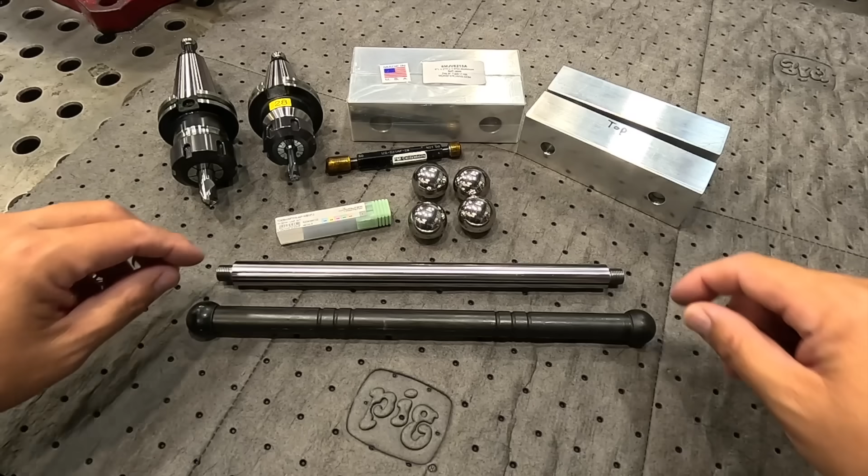In the previous video, we set this piece of material up. This is some 440C stainless steel, and we did our turning and threading on the ends there. Got that done, and now we're going to move on to the last phase of the vise handle, which is going to be the ball ends.

I'm kind of replicating the original vise handle here. This is what comes in the Kurt vise. One end of this handle is turned and threaded just like we did, except I went with 7/16-20 threads. This ball is manufactured with some threads so that it'll screw together, and they use some Loctite. That may be what we do as well, but we're gonna just replicate this.

So this is what we're gonna be doing, only I decided to up the diameter. I went with 1¼ inch, and of course stainless steel.

To start this job, I got some soft jaws right here. I ordered a set from Monster Jaws, so I got a couple pairs ready to go for whatever work we can use them for. I've got these two jaws, marked with the top anyway.

First phase of the project, we'll set these guys up in the CNC and machine a sphere pocket in there so that once these jaws are bolted in the vise, we should be able to capture this ball bearing, or the stainless steel ball. It's not a bearing, I keep saying that because it looks like a ball bearing.

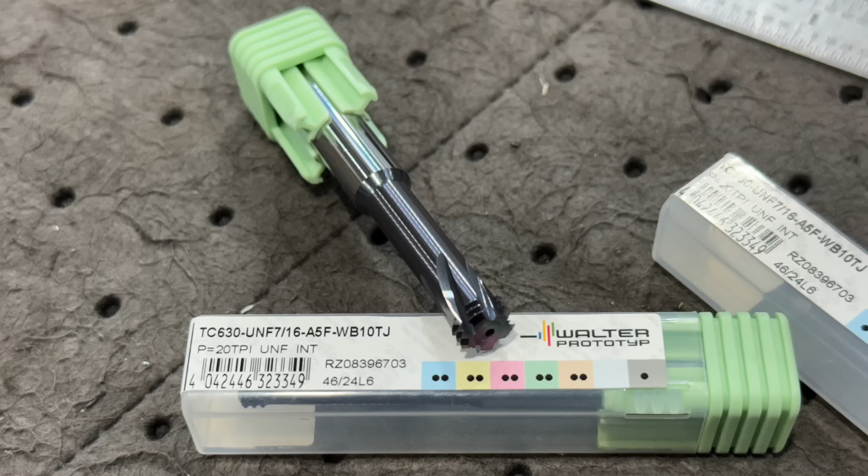This is a new thread mill, from Walter Tools. This one is designed for a 7/16-20 or 20 pitch thread, so 20 threads per inch, and I haven't used this type of thread mill yet. It's solid carbide, and hopefully it's going to work pretty good.

This kind of stuff makes me really nervous, but if everything's correct, we should be able to come in here in that hole and cut those threads in that ball. So that's the plan for that guy.

I've also got this go/no-go gauge that we can use to check our thread. Chances are it's going to be tight going in there the first time, and if that's the case, we're going to rerun the thread mill program by itself. Just make one more pass, maybe bump it over 1/1000th at a time, until we can get our go gauge to screw in there like it's supposed to. That's the plan there anyway.

I think what we'll do to start off, we'll go ahead and go to the computer. I'll give you a quick rundown of what the programs are going to look like, and after that we're going to get this set up in the Milltronics toolroom mill and get started on this job.

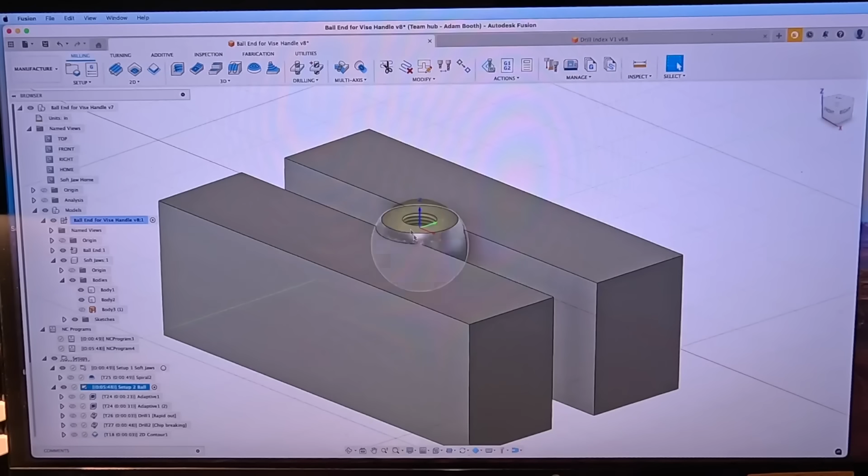All right guys, I'm going to give you a quick rundown in our Fusion 360 and show you what we're going to be doing here. So as mentioned before, we've got two setups. First setup is going to be machining the two soft jaws for our sphere, and then the second setup will be machining the sphere itself.

Okay, so we'll start with setup 1, which is going to be the soft jaws. We'll go ahead and activate that there. This is in the orientation that it's going to be sitting in for the machining, sitting in the vise. So we can turn off, let's see, it's body 2.

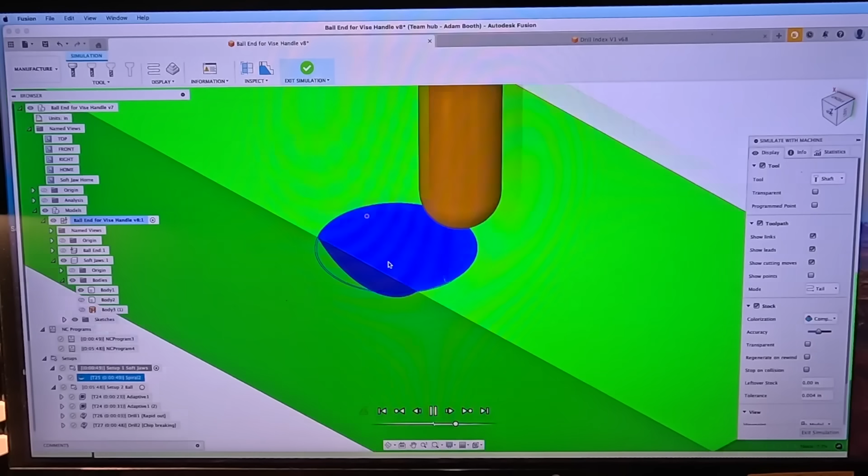Simple operation here. We're going to use a spiral pattern, so we'll go ahead and simulate this so you can see it. This is the 1/2 inch 3-flute ball end mill that we're going to be using to machine this. Spiral pattern, I've got it set at a 10 thousandths step over, so it's a constant engagement of 10 thousandths, and it's just going to spiral all the way down to the bottom of that pocket and get it all machined in one setup right there.

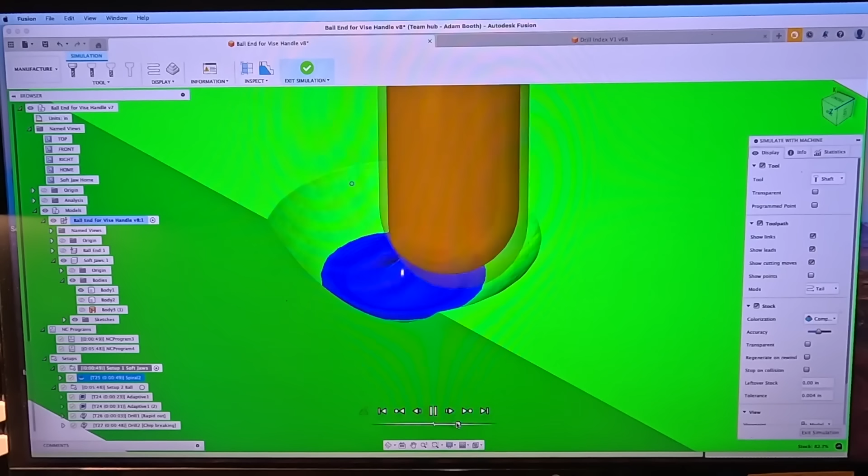All right, so we'll speed this up a little bit more. You can see it's going to go down and hopefully just machine a nice, clean, even pocket all the way to the bottom, just like that. Hopefully once this is completed, we'll have a nice pocket for our stainless steel ball to set in. So once this is done, we'll take this one out.

I'm going to go ahead and set up a work stop here. These jaws measure, I just use calipers. I haven't measured them with any kind of micrometer or anything, but the vise jaws seem to be very, very close tolerance to each other, I'd say within 1/1000th of an inch. So I feel pretty good about just simply using a work stop on one end, taking one jaw out, sliding the other one in, and hitting cycle start to get the second one milled.

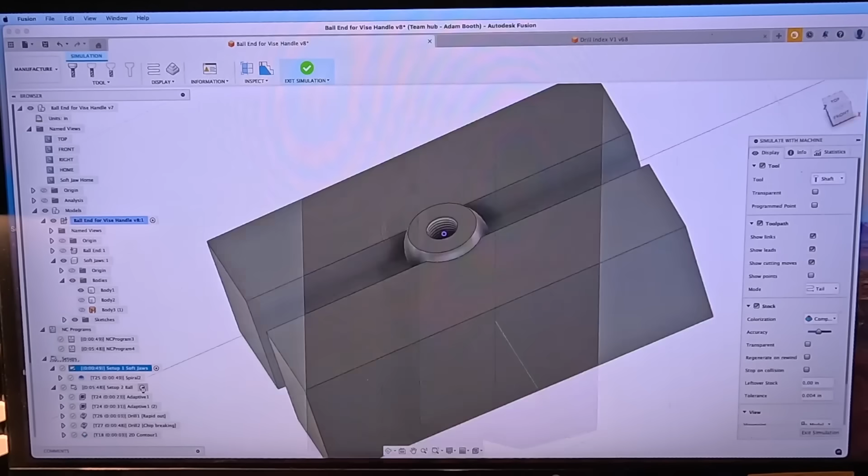All right, so that's setup one. We'll go ahead and transition to setup two, which is going to be machining the balls. This is what it should look like set up. We'll go ahead and simulate this one next. Let's see, simulate, and I'm going to slow this down a little bit.

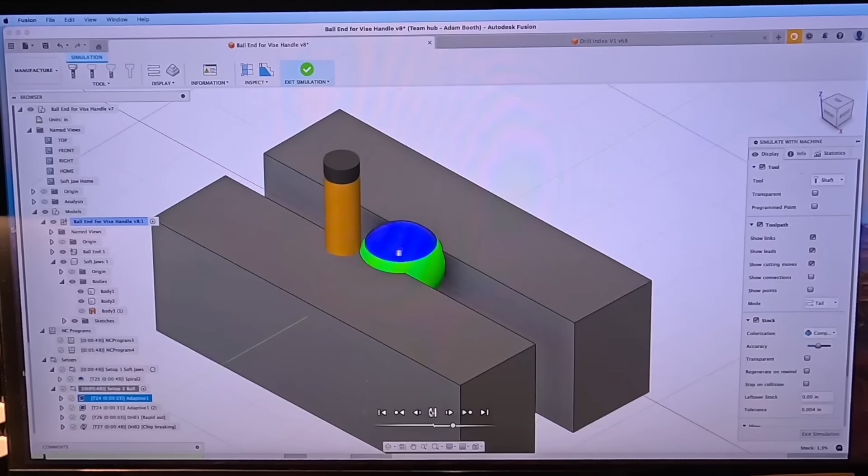All right, first setup, we're going to be using a 1/2 inch diameter 6 flute end mill. This is one that I've had that's worked really well, it's that IMCO power feed. And we're using an adaptive tool path here to come in and mill this. Let me zoom in so you can see it a little bit better.

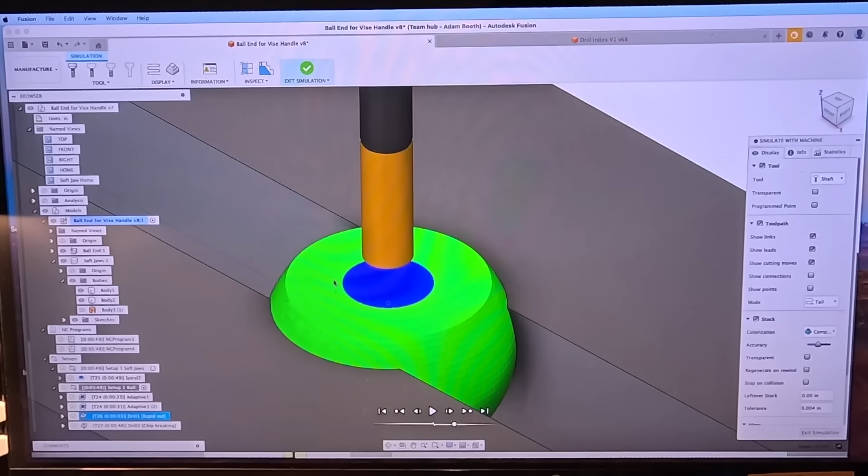Speed it up a little bit. Just get it done in one pass there, and I left 10 thousandths, and we'll repeat that. We'll come in there with another adaptive and just clean that up. And then the next one there, after we mill the top, this is going to be a spot drill, just to drill a spot in the center. All right, there you go. And then the next cutter is this guy, this is our drill, 29/64, which is tap size for a 1/2 20 thread.

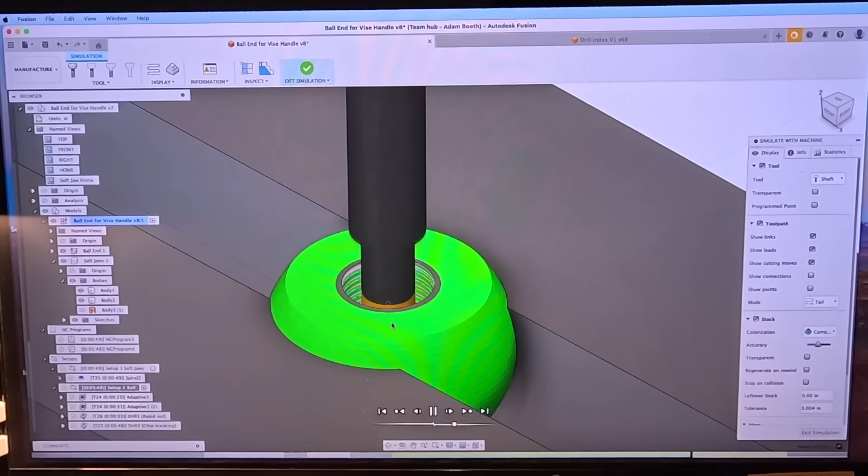All right, and the next one, we're going to be coming in here with chamfer. Cut the chamfer, and then the last tool, you can see this is going to be our thread mill. I've got it set to 3 passes at depth, and then it's going to have a spring pass to come in there and clean it up. And as mentioned before, we can post out just this thread mill operation, and I can come in there and make one pass at a time, bump it out 1/1000th or 2 as we need until we get our go gauge to fit in there just like it's supposed to.

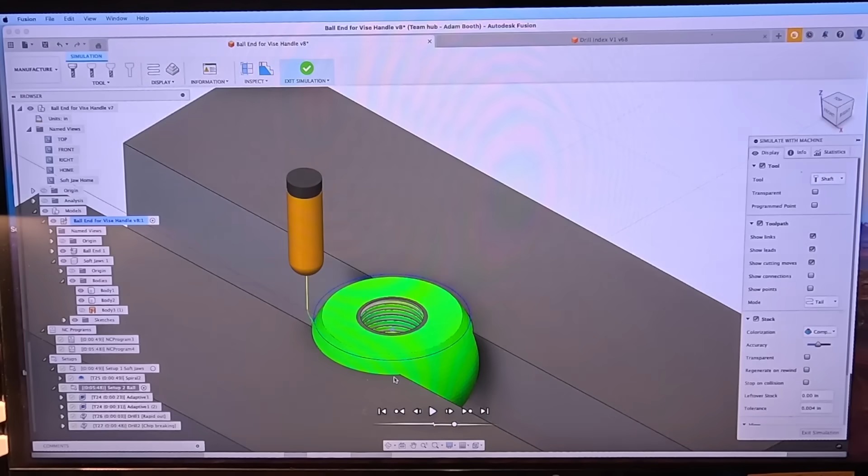All right, and then this last program, we're going to be using a 1/4 inch diameter ball end mill, and we're going to just use the 3D deburr, and we're going to just break that edge. I've got it set to 5/1000ths and clean that outside edge up right there. All right, and that's it, that's the end of the program. So I'm ready to see how this is going to work.

I've got 4 of the balls, so I think what I'd like to do is go ahead and show you machining the soft jaws. Once that's done, I'm going to set one of these balls in there and run through the program to make sure everything is working correctly. Hopefully that'll work out fine. Then we'll have 3 more, and I'll try to get good video of machining the balls at that point. All right, I'll meet you out at the mill.

Okay, this is the vise we're going to use. I've got it all clean. We've got a set of parallels in there, and we're using our Edge Technology parallel separator, and we're going to use their work stop right here as well.

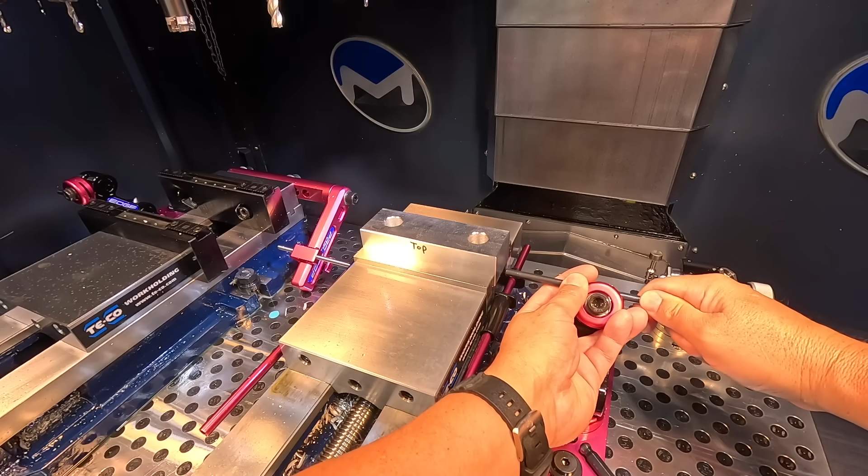All right, so let's get a jaw in there. There's a little ding right on that corner, so we're just going to hang it off just a little bit like that. Put that in there, and what I like to do is get the work stop. We're going to loosen this guy up, get our work stop positioned where we need to, about like that. Get it tight, and then loosen up the workpiece again, slide it up to it, and retighten.

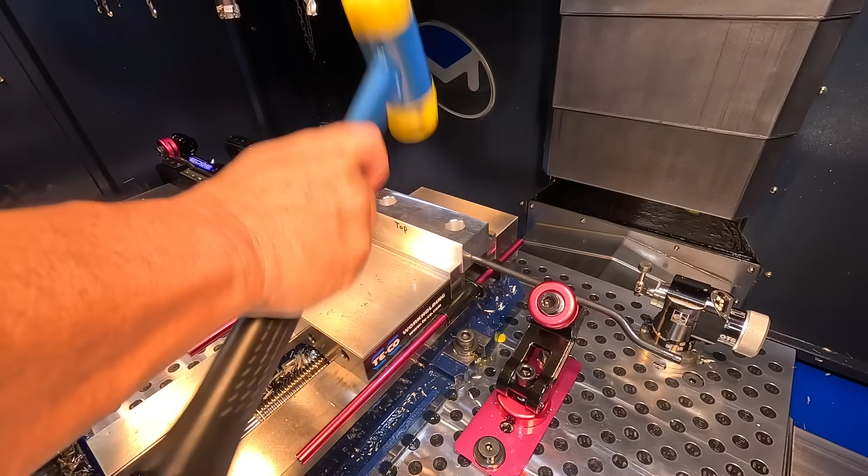All right, next up is our probe op. Go ahead and get this thing centered up. I was planning to tap these down. Yeah, that's good. All right.

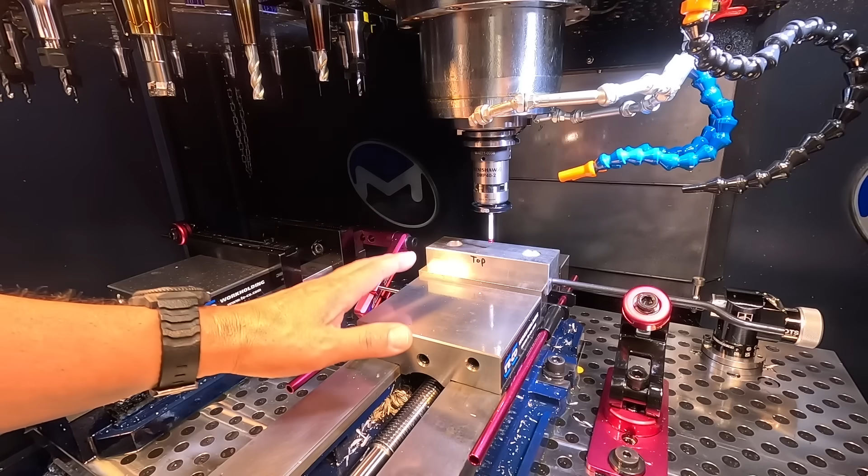We've got the Renishaw loaded up. We're going to go ahead and get this probed. This is going to be set as a G56, both for the soft jaw, and then once we get them bolted on and find the center of the ball, I'll set that as a G57. I'm still using both of these vises for a current prototyping job. This one is G54, this one's G55, and I didn't want to mess up the work locations for those work offsets. So anything we're doing now until I'm finished with my prototyping will use some different work offsets, such as G56.

Also, all the tools we're going to use for milling the soft jaws and the balls, I'm going to hand load those. The reason being is I've got the whole tool carousel loaded up with tools I'm still currently using, and I don't want to mix myself up by taking those out and putting them back in. So I just have all my tools laid out on the table, numbered, so I know exactly which tool to grab. Between each program, we'll just take that tool out and stick the next one in and keep going. So, the soft jaw is going to be X, Y in the center, and Z is going to be off the top of the workpiece there.

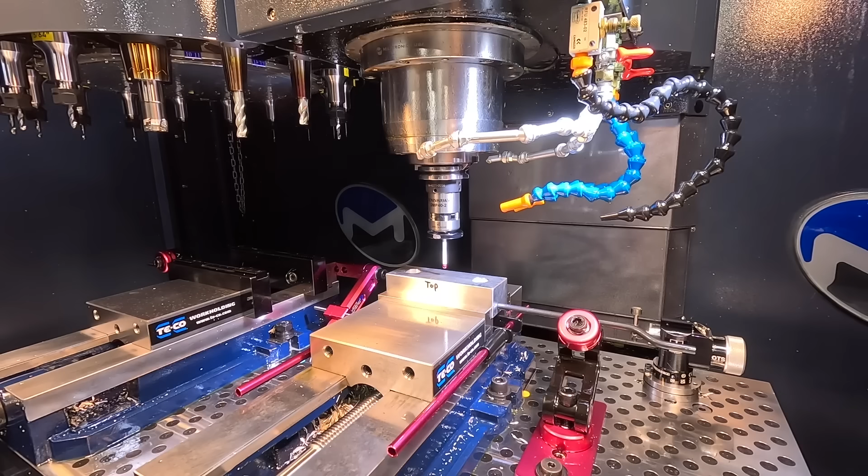Okay, we got our workpiece probed now for G56. Go ahead and gently - this is one of the things that I practice: when I'm done with the probe op, I slow the rapid down to usually 50%, and move it very slow to make sure I'm going in the right direction. All it takes is smashing that probe one time, and you teach yourself to slow down and not be in a hurry. So once I know I'm up safely out of the way, I bring it back up to 100%. Then we can take this guy out, and I go straight to the cabinet where it's protected.

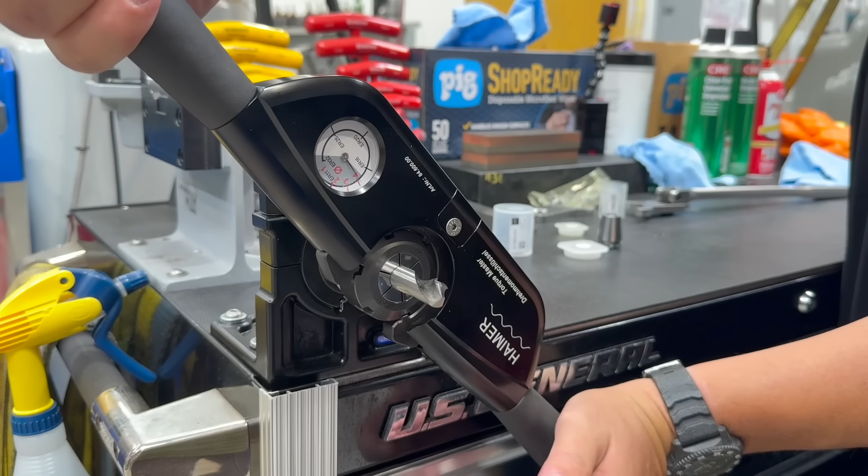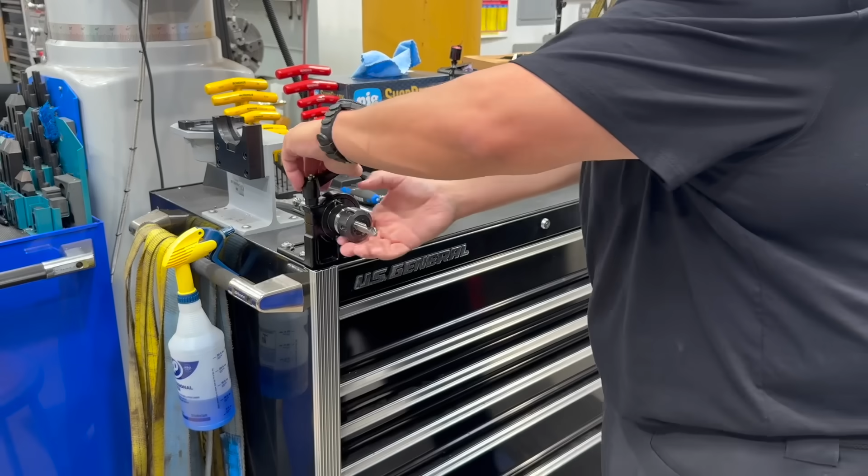Here's a look at our tools that we're going to be using for the job today. Got them starting at 24, going up to 29, with the exception of 18, which is a tool I've already been using - just a chamfer mill. We have our flat end mill, 1/2 inch, ball mill, spot drill, 29/64 drill, thread milling, another 1/4 inch ball mill, and then of course the chamfer. Just wanted to show you the tools we're going to be using.

So the first one will be tool number 25. We'll get that loaded up and I'm going to test it and see if it's cutting in the right place, and then we'll start machining this aluminum. We should be ready to run. I verified the tool - it looked like it was right on Z0 on the top of that workpiece.

I moved it up 2 inches, did an air cut. Everything's looking pretty good, and we're going to go for it now. Adjusted our Z back down to our 0.

I'm going to use a small amount of flood coolant on this to help lubricate the cutter, but I'll try my best to keep it from splashing so bad so you guys can see what's going on. We'll go ahead and start here and see what we can do. I'm going to bring it down a little slow, and once it's cutting, we'll bring it in to full 100% send.

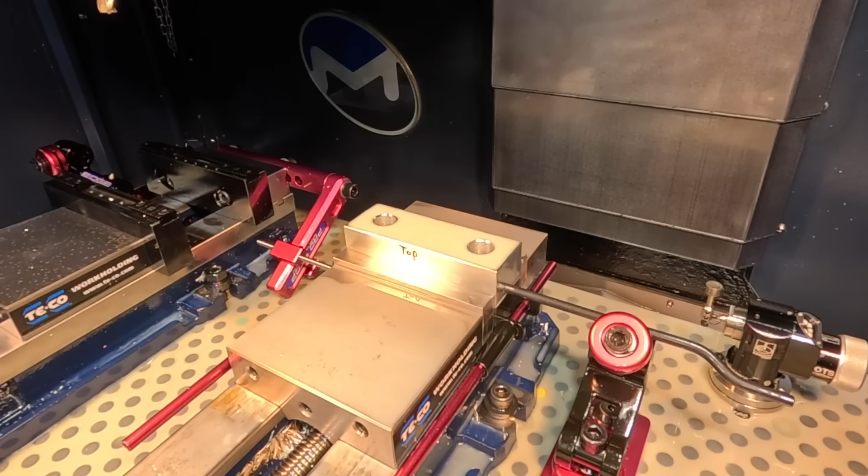Here we go. Bring it down slow, make sure the coolant's touching it like it needs to. Running 8,000 RPM. Let me bring it down nice and slow, down to my 0 point. There's our clearance, 200. I think that's pretty good right there. Let's go for it, here's 50%. It's cutting, I'm gonna go 100% now.

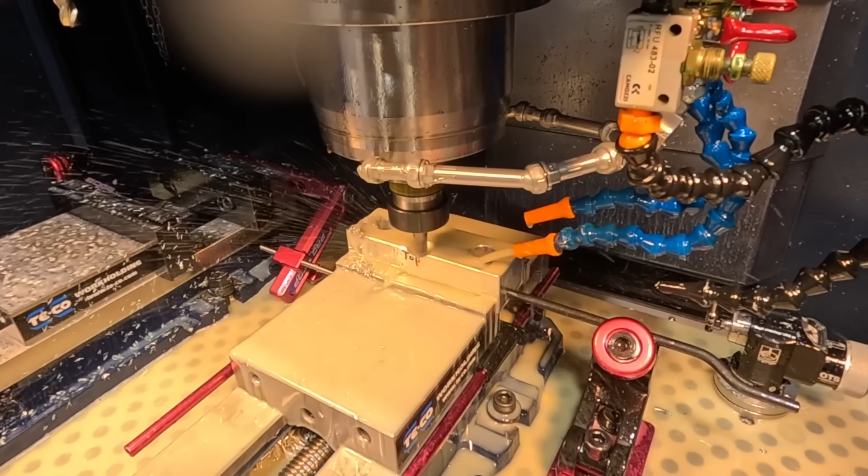I gotta say that I think it went pretty well. No crashes, everything seemed to work. Cutter did a good job.

Let me get a towel. I'm gonna try to blow this off a little bit.

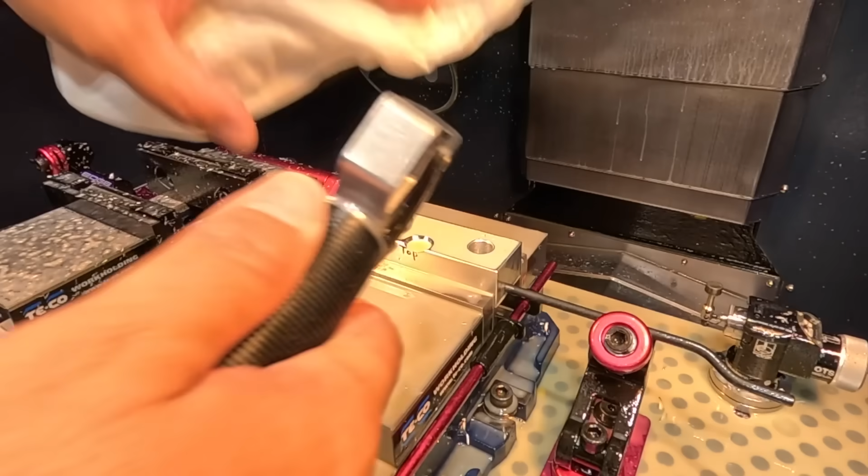Let's look at that surface finish. It looks like it did a good job, feels nice and even. Let me go grab one of the bearing balls and we'll test fit it. All right, there's one of the balls. Fits in there beautifully, just like it's supposed to.

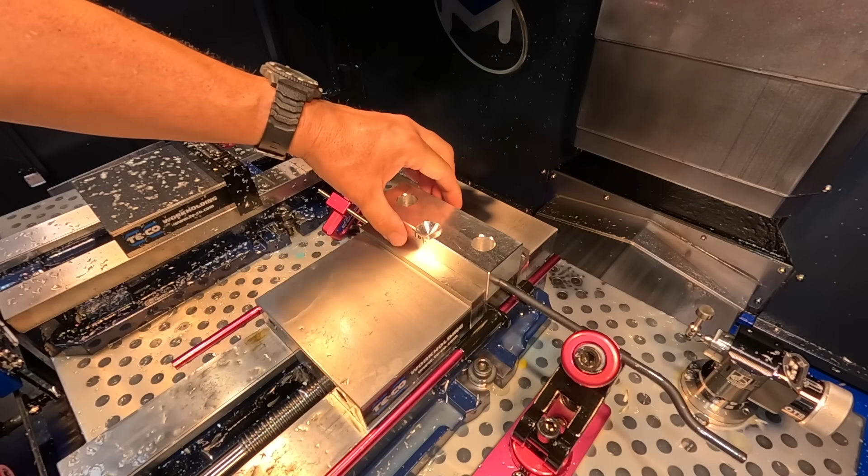All right, we'll get this cleaned up, swap the jaw out for the second one and keep going. One jaw down, we'll go ahead and just wipe these jaws out.

Well, I can tell that it's touching, there's friction there. We'll leave it just like that. I'll see if I can get you a little bit better video of the ball milling this time.

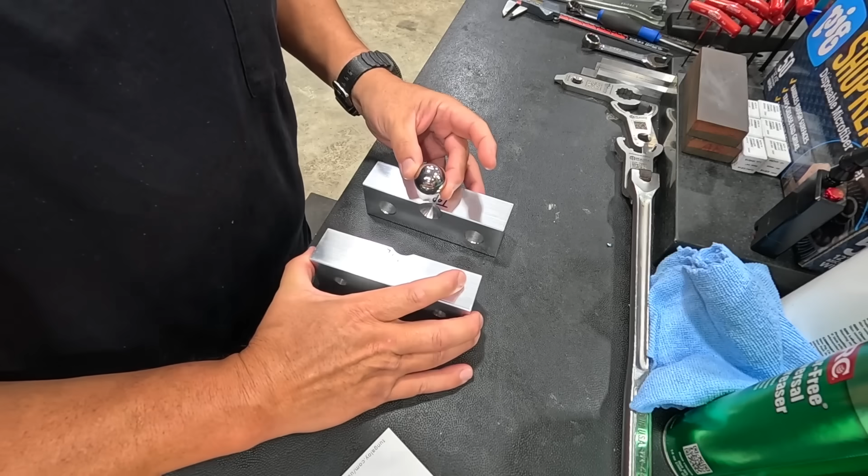All right, there's our two jaws. You guys can see them there, I think. It looks good. Yeah, that looks good. I think that should do the job right there. Awesome.

Okay, well, we'll go ahead. I'm going to get the vise cleaned up, and we're going to get these guys bolted on. So we just need to go ahead and take all this stuff, break this down.

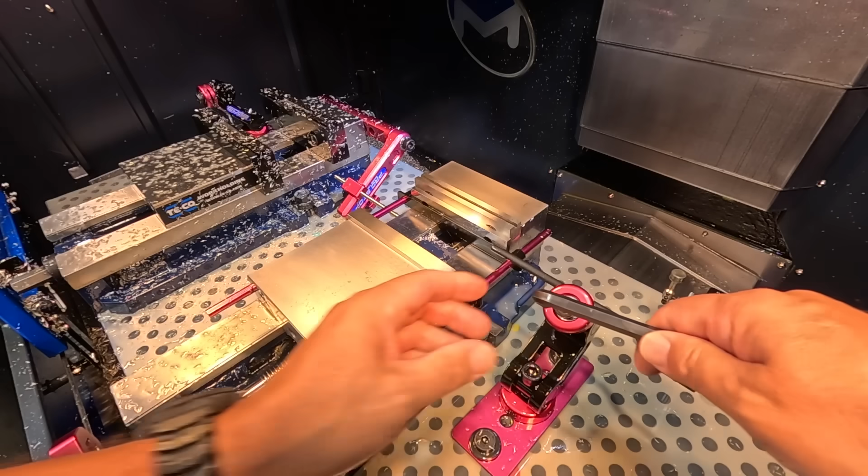I'll loosen this guy and just pull this rod back out of the way, like that. Parallel separator out, and a couple parallels.

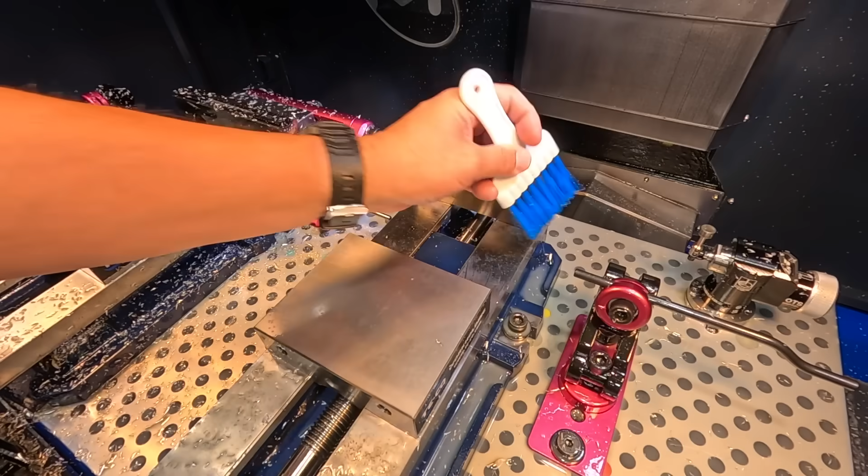Okay, there's our first jaw. Let's see if our bolts are going to work. There we go.

Yeah, this moving jaw is always kind of in the way. I think it might be safe to, we'll put our bolts in here, leave them loose, and then tighten it up with the ball in there. Just leave it barely loose, tighten it up, that way they'll both kind of center, hopefully.

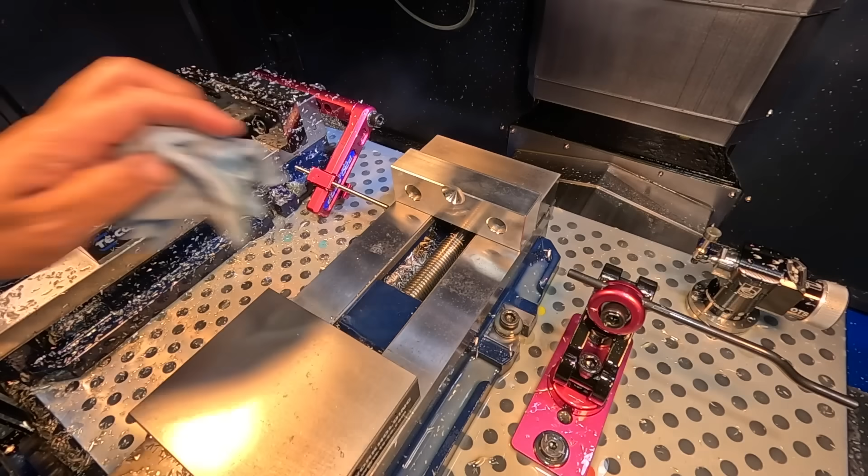There's the air cutting off. So the air runs through the spindle on the Milltronics here for, I believe, 15 minutes—either 10 or 15 minutes—to help continue cooling the spindle. So that's why when we're in between machining, you may hear that air kind of going through the spindle there.

It would help if it would go in. There we go.

Okay, both of them are just slightly loose. And we'll go ahead and put one of our balls in here.

All right, well that ain't gonna work because I can't get the wrench in there to tighten it up, can I? Yep. All right, so I was getting ahead of myself. Let me try it another way.

Since we've got it, that's pretty well centered. I don't know if it'll stay, but I'm just gonna back it out there. I think the second time it worked good. What I did was I just very slightly tightened up these two bolts on this side rear—just very slightly, just enough so when I back up and I'm moving, putting a wrench in there, it's not trying to move it one way or the other. And I think that worked good.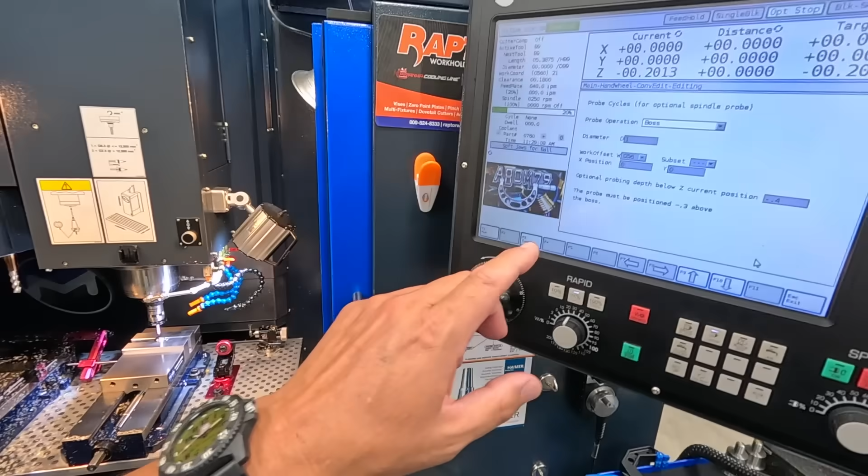I went ahead and ran through that first probe op just to make sure I could get my dimensions where it needed to be. But what I'm using is the Boss probe operation with a 1-inch diameter, just because we're on the top of it. It's not going all the way down to the center. G56 and an X and Y at 0, and I'm using the optional probing depth at negative 0.4 inches. And that little formula worked really well. So we'll set the camera up so you can see what it looks like probing that.

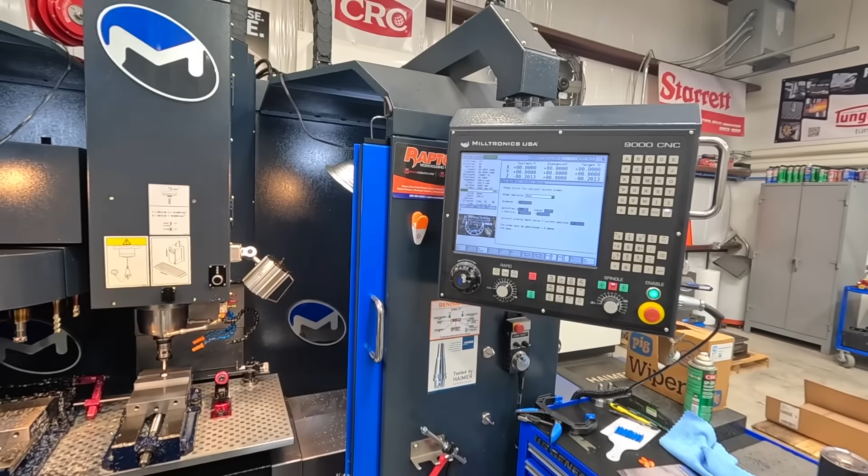All right, the boss operation for our probe worked really well to find the center of the ball. And then we're gonna go ahead and do a single surface Z, the top of the jaw there being our Z0.

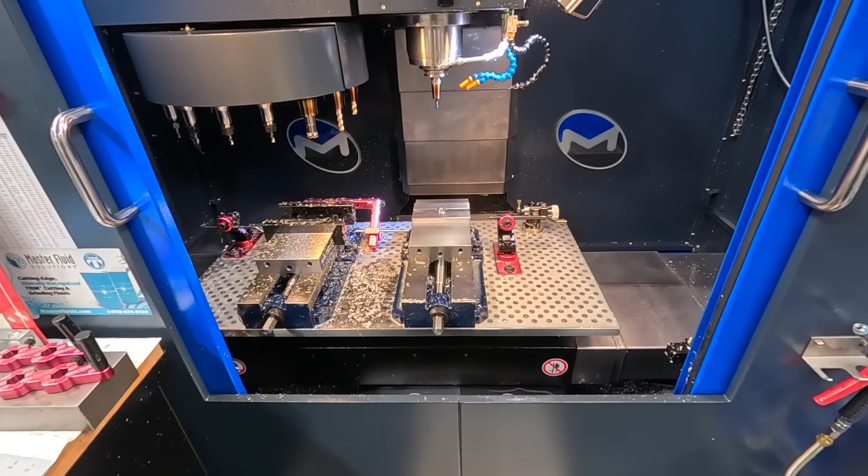Okay, well, I've got the first one machined. I did this off camera because, as I said, I gotta focus on everything and make sure we don't have any major crashes in the process. Everything worked great, and we have a beautiful part there, exactly as we designed. But I did mess up one thing. I made a mistake. So here's our go, no-go gauge.

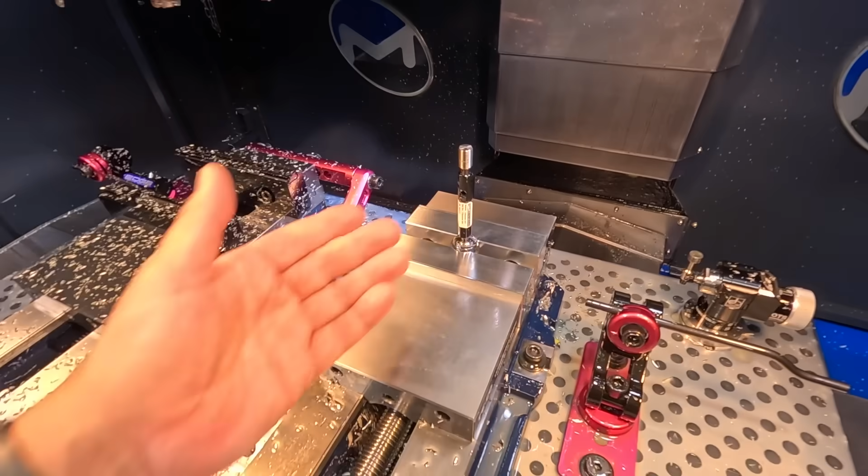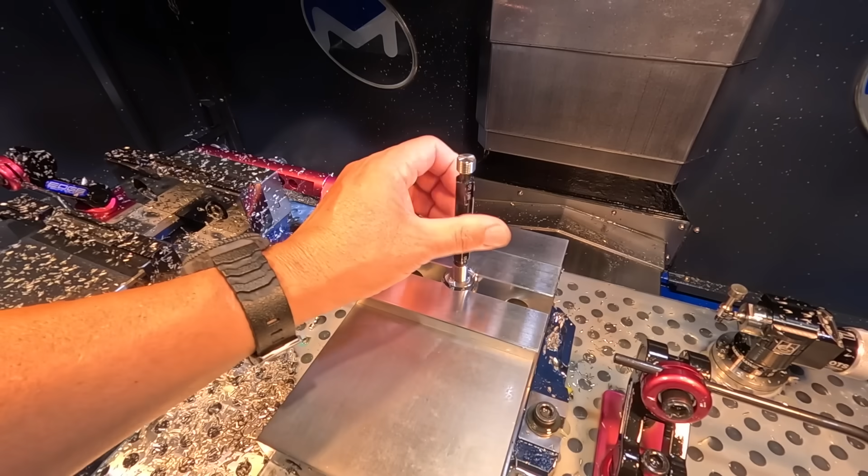And if I take the no-go, you can see that it screws right on down inside there with quite a bit of slack in there too. So it's very obvious that I cut the 1/2-20 threads oversized, the diameter. I cut it oversized. We'll put the go side in there and I'll show you just how loose it is. And I figured out what I did wrong. I'll tell you. So you can see how loose it is.

And with the no-go going in there, that is a no-go part. That is a conversation piece for the desk right there. But that's why I got 4 of them. We got 3 more there to do.

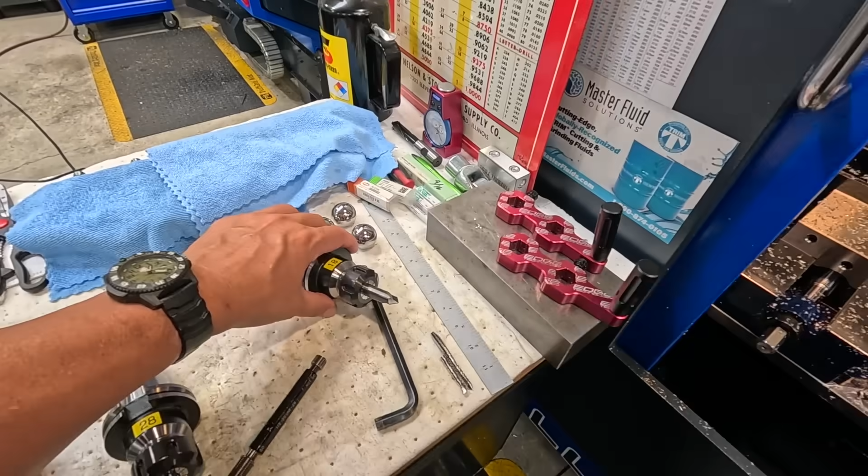So what I did is I did not have the diameter of our Walter thread mill correct in Fusion in my tool library. Now when I installed this, I used the Renishaw to touch it off and do the diameter. So that is tool number 28. And you can see the diameter there. Actual diameter is 0.3692. That is what the machine measured the diameter of this thread mill at.

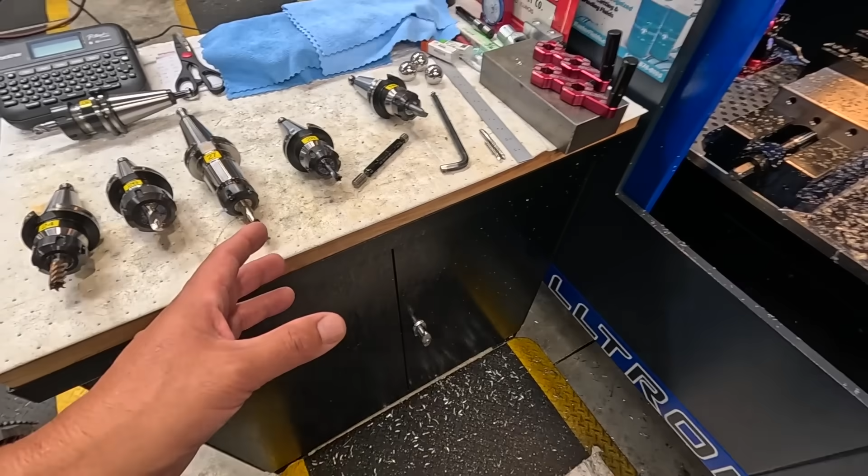In my Fusion tool library, when I was building this program, I didn't have a cutter, so I just took one out of the Fusion library, and I can't remember which brand that was, but anyway, the diameter for that thread mill that I was borrowing to get the program written was 0.35. I forgot to change that diameter to the actual diameter of the tool that I was using, and that should be the problem. So it thought that this tool was 0.35, and in fact it was 0.369, so that's why it's cutting a bigger diameter hole in there.

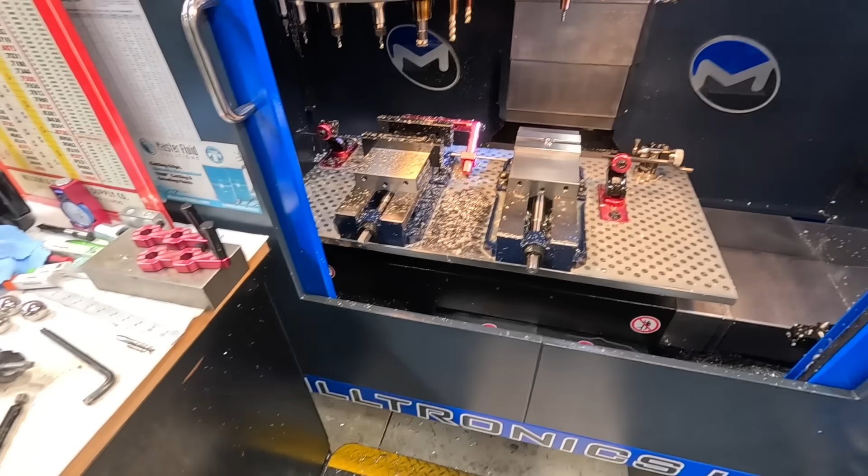So I have modified the program, edited my tool, I have got it re-uploaded into the computer here, and we're gonna go ahead and put another ball in there, and we'll cut it again. I'll get some video this time to share with you on how it went. Everything worked really well. The milling, the drill, thread mill, everything is working great. So let's put another one in and machine our second one.

Other than the threads being oversized, it looks beautiful. Real happy with the machining of that guy. So let's grab the second one.

Okay, ready to cut. All right, let's run through this second one. We got the GoPro set up. I'm gonna try to get you some better video on these next 3, okay? So just bear with me. And again, this is all manual tool change on all these tools here. And I shut off this other work light because it just seems like it always blows out everything right on top of the vise and it's harder to see it.

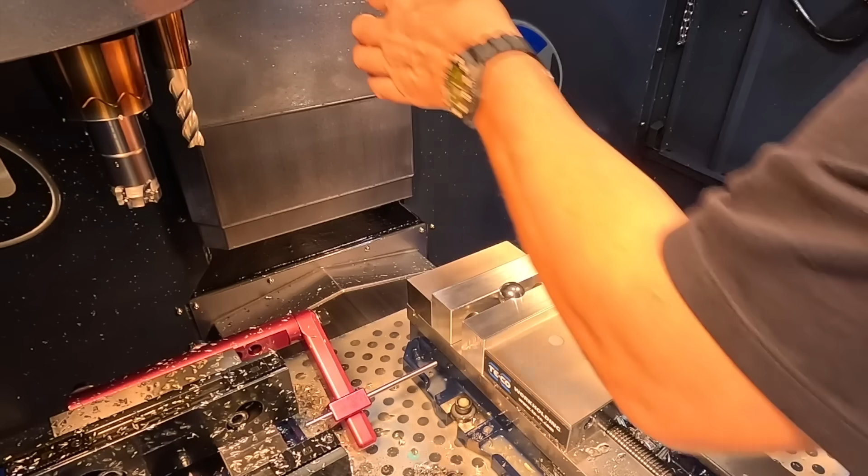All right, so we're gonna take this one out. It wants number 24. This is why I've been putting these labels on all my tools. This is a temporary thing, so after this job, these will get peeled off and I won't worry about this tool number again. All right. And I will have to adjust my coolant a little bit here and there. Okay. This is making a 10 thousandths cleanup pass on that face.

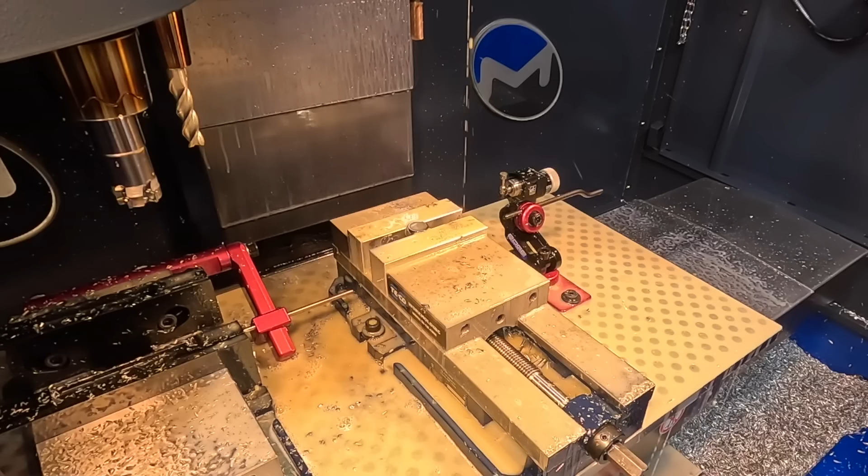All right, so we'll do a manual tool change. Okay. Going to tool number 26. It's going to be our spot drill. Tool reset, cycle start. Thirty thousandths deep. All right. Tool number 27. This would be our 29/64 Chicago Latrobe. That's a cobalt split point drill that we're using.

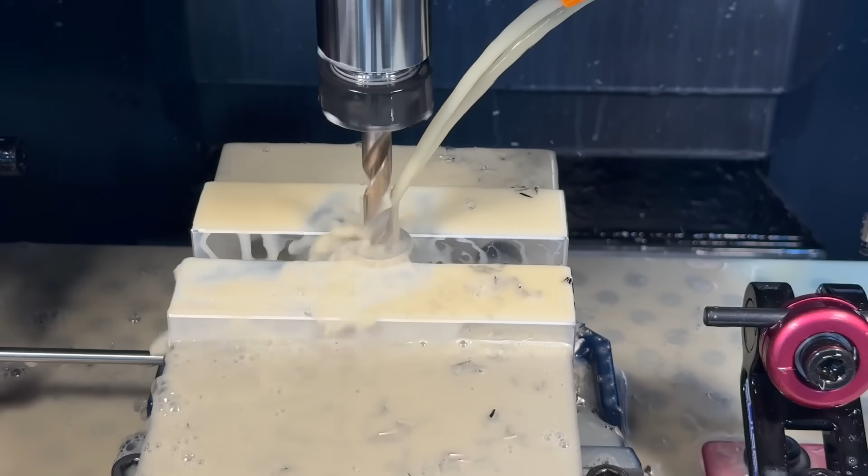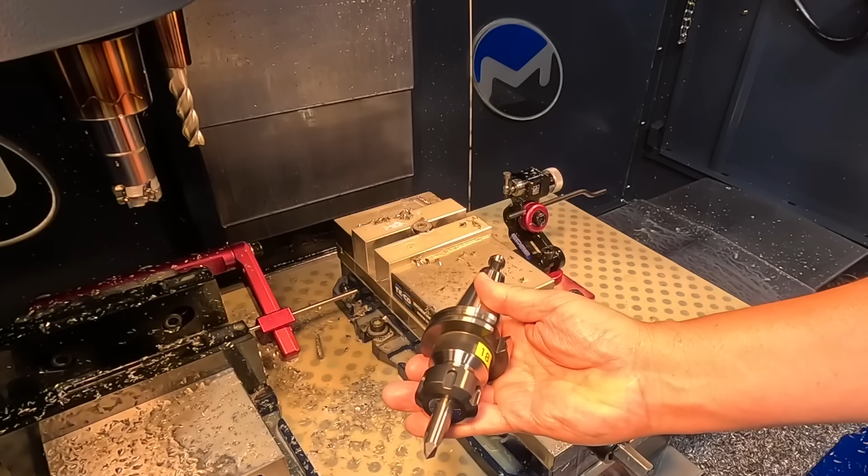I'm going to go ahead and adjust my coolant while I'm here. Try not to let it sling all over the camera. Tool reset, cycle start. All right. Okay, drill's coming out. It's doing good. Doing good. All right. Next tool, number 18. That's going to be our 1/2-inch diameter chamfer mill. Tool reset.

All right. I'm just watching the screen. Whenever it says to change tool, it's when I reach in there. All right, tool 28. This is going to be our thread mill right here. I hope we have better luck this time. I'm going to walk it in there a little slower just to get it started. This makes me really nervous. All right, I'm going to adjust this coolant a little bit. Try to get some coolant up in there. All right.

Chaser just kicked on. All right, there's 100%. A little bit more coolant, just trying to get it down in the hole there. This will be the third pass, and then it will make a spring pass. There's our spring pass.

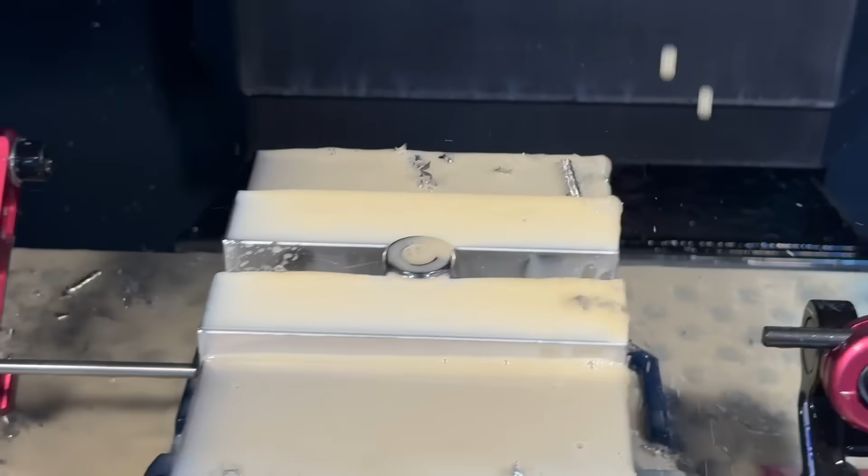And the one thing that I forgot to do also is readjust my Y home. I want it where it comes straight out here to me. So let me move it over out of the way a little bit. Let's go ahead and inspect it. Go gauge. Might be a little tight. It doesn't feel like it's starting straight.

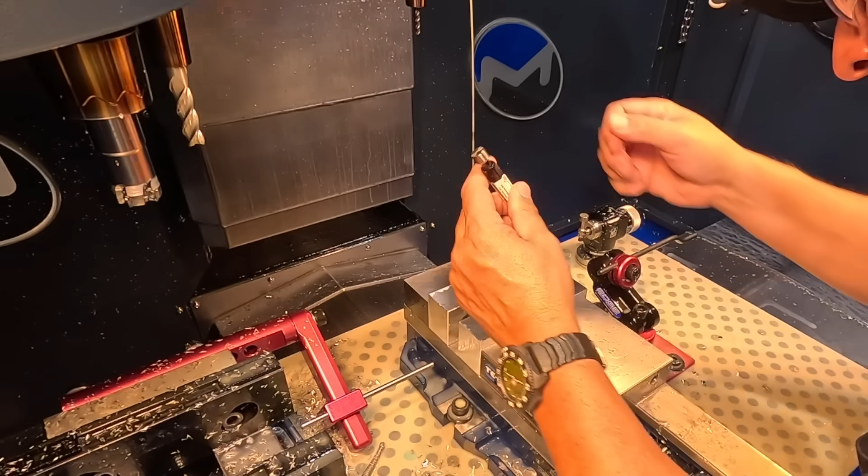All right, I think our pitch diameter is a little bit too small. That's what I was hoping for. I actually set that so that the major diameter should finish out at exactly 0.5, and the plan is to go in here and cut it just like we did. This was supposed to be like number 1, and if the gauge is a little bit tight, which I thought it might be, I'm just going to rerun. Dang it.

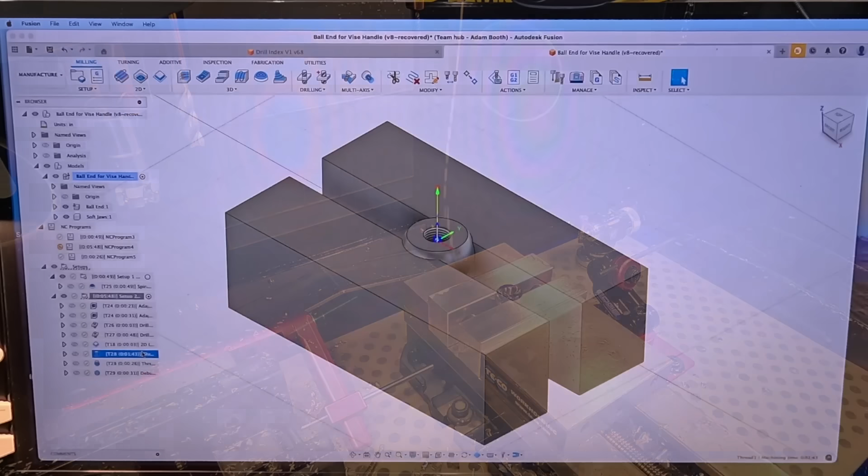I'm just going to rerun the finish pass on the thread mill cycle, but I'm going to have it adjusted 2/1000 out. So we should be able to come back in there, pick up that thread, make one pass, and cut another 2/1000 out of it, and then we'll check it again with the gauge. So this is the correction that I took with the thread mill, and this is what Kevin over at Mechanical Advantage showed me to do. An easy way to go back in there and recut the thread using a thread mill.

All right, this is the actual thread mill cycle right here that I have highlighted in blue. And if we go to edit that, and over here on the passes tab, we have our pitch diameter offset set to 0.047 inches, and that should bring it out to your 0.5 diameter. All right, multiple passes of 3 with a repeat finish pass. All right, so the 0.047 is the diameter that we started with. I'm going to cancel that.

And what we did is we just copied the same exact program, we duplicated it. So that's the next one underneath here. And I had it suppressed the first time. Now I've unsuppressed it, and we'll go back in here and we'll go to edit. And on the passes tab, on the pitch diameter offset right here, I've got it at 0.049, so 0.002 larger

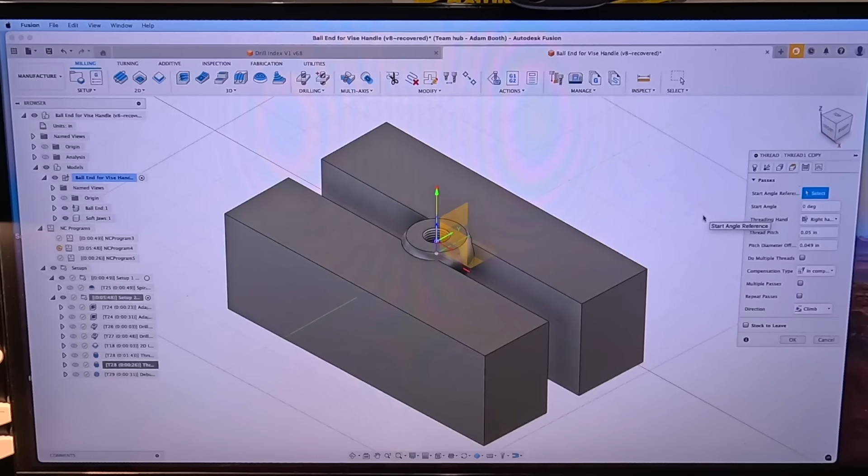than the previous. All right, and it's just going to make one pass because I don't have multiple passes selected, and I don't have a finish pass selected either. So it should drop in and make one pass up, but move out an additional 0.002 from the last finish pass. So we'll just try cutting 0.002 at a time. If I do this and it's tight, I'll come back in here and I'll adjust this, maybe another 0.002 up to 0.051.

All right, so I've already got this saved. I've already got it posted on my thumb drive. We're gonna go ahead and eject that one now. And I'm gonna go install this in the computer, and we'll try running this program one more time. Okay, we got it loaded and we're ready to run. Going back with our thread mill, tool 28. Tool reset, cycle start.

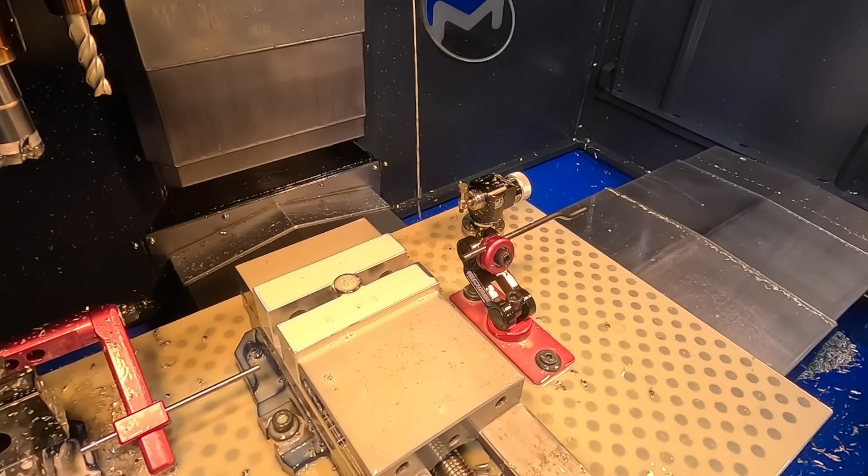I'm just walking it in nice and slow. I'm still nervous. Okay, looks like it's working. I did not fix that because there was a good chance I was going to have to go and adjust this again. And I forgot.

Yeah, it's still acting a little bit tight, so I'm going to have to bump this out again. Let's take another 2 thousandths. I'm just doing 2 thousandths at a time until we get there. I just don't know how much to take out each pass without overshooting it, so I just feel better playing it safe. Once we have it ready to go, I'll have that number in the program and it should be good to go.

Looks like we're finally there. Maybe not, it's getting tight. It's trying to go in there, but I can tell that's too tight. Let's go ahead and take another 2 thousandths pass. I think we might have it once we do that. So one more pass in there.

Now, if this works out, I'm going to go back to our original thread mill in the very first tool path that we made, and I'm going to adjust that to the diameter that we ended up on our copy program. This is going to be the one. I think this is going to be good. Going all the way in there. There's the bottom of the thread anyway. Let's try the no-go side. Make sure it does not go in there.

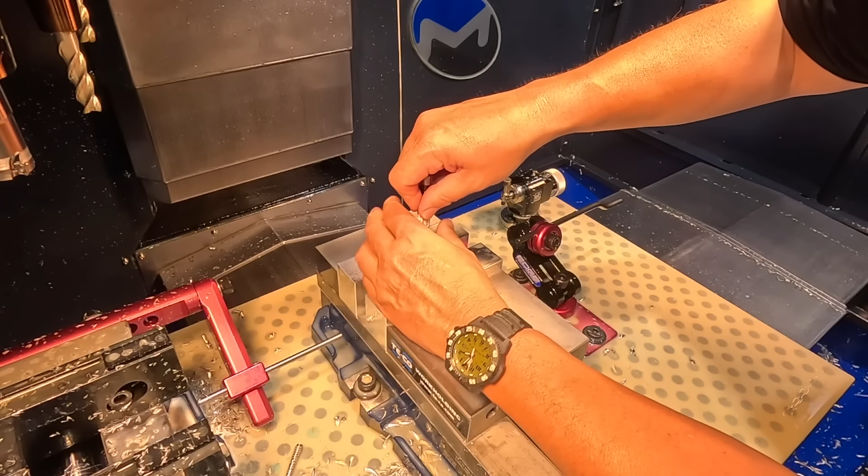All right, it gets tight. I think we did good right there. So our go side fits just like it should. We're right in the middle of it. Everything looks good. That one is finished up. Now we can go ahead and put our other two in there and maybe get a couple more close-up vids of the machining action. I'm going to go modify my original program for the thread mill so I don't forget it. Take care of that, and then we'll finish this job.

Okay, I've got my final program modified and saved in the computer here. But here is the handle that we turned and threaded in the last video. So let's go ahead and see if it screws in. That feels good. There it is. All right, good. We'll go ahead and check the other side. That one's got a little bit more clearance than this other side there, but that's going to be fine. There we go.

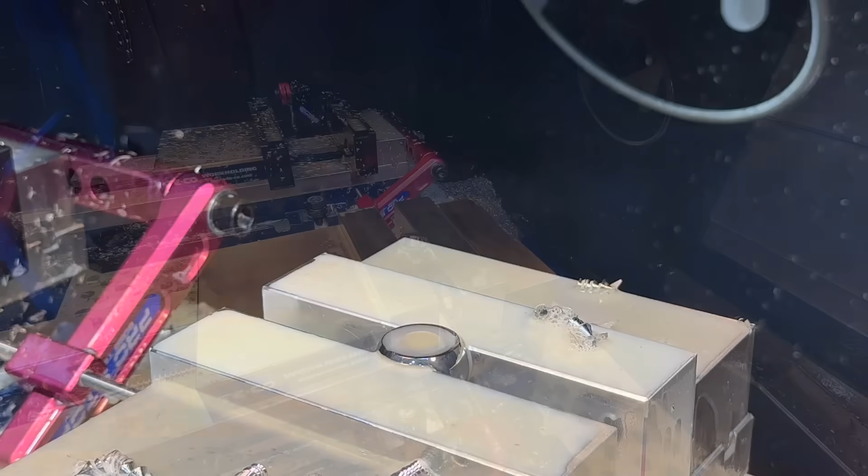All right, guys, that was workpiece number 3. I made some changes to some of the cutting programs there. The thread mill, I was able to go onto the Walter site and put in information. I was able to get some good feed and speed info for the 316 stainless is what we're cutting. And so I bumped that up. You might have noticed in the last clip, we're actually moving through there quite a bit faster.

A higher surface speed, and instead of 1.5 thousandths per tooth, I upped it to 2.5 thousandths per tooth. It was actually recommended up to 4 thousandths per tooth. I thought that was a little aggressive, especially since I haven't done much thread milling, but it did it awesome. It did a great job. Let's get our go gauge and go ahead and check it, because I haven't actually checked that yet.

This is the first one after we modified our thread depth and got it right. So let's see where we're at now. Is it gonna go? Yes. Going in there. That's actually got a better fit than the previous, probably because we ran through there so many times.

In fact, it's acting like it's wanting to hang up there. There's probably a chip in the thread, you know, a small chip. Let me get my other air nozzle and see if we can blow that hole out better than I did. See if that makes any difference on our gauge. It went most of the way down in there, so I think we're good.

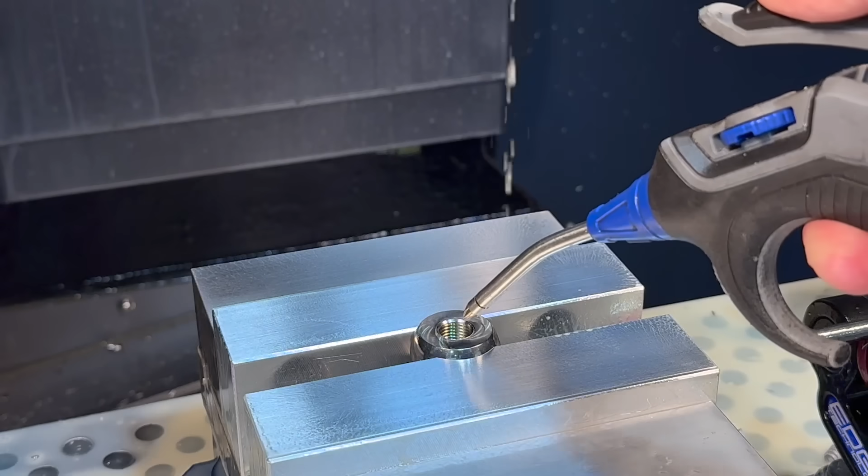I'm really excited to finally get to this stage. We now have our new vise handle complete. Balls are complete. This spindle is ready to put together and put back in the vise. So before we put this in there, I wanted to back up for a second here and mention I do have the new spring. In the last video when I was going to install this, this is the spring that came with the original spindle, and I didn't check it beforehand. It would not slide over the 1¼ inch diameter there.

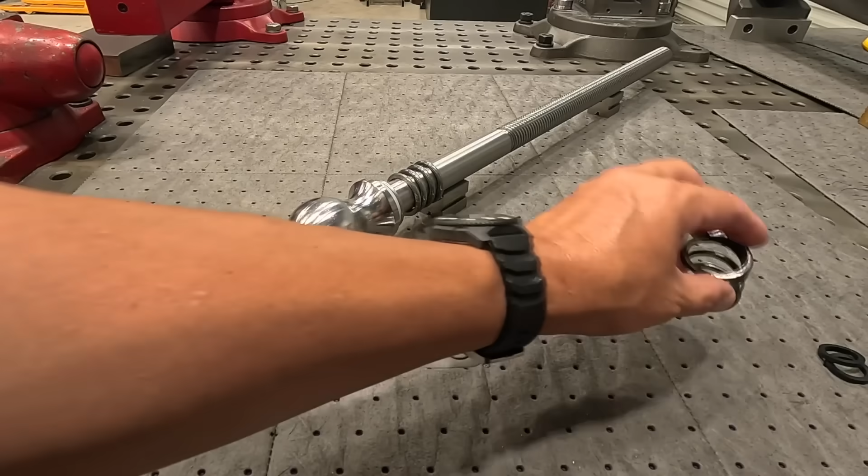So I actually got on McMaster-Carr's website and I found this exact spring, and the next size up is the one that I bought. A little bit larger on the ID there, and the only major difference honestly is the compression rate. The wire diameter is slightly larger than the one that came originally. So we finally have a spring on there. That's going to work really good. We've already got one of our thrust bearings on there. Okay, so I wanted to point that out.

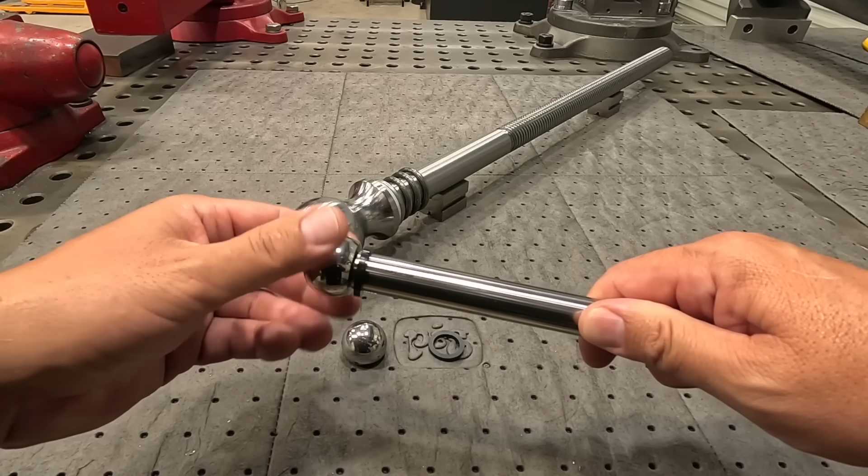So we've got our square O-rings right there that we're going to use. I don't think I'm going to go with the round O-rings. I think the square is going to look and function better on this. So let's get this in there because I haven't even seen it installed yet. So let's put an O-ring on here, and I'll show you how I came up with the diameter of the flats on the balls. So if we screw this together here and slide that square O-ring down, if you look closely, you'll see that the OD of the square O-ring actually matches that flange diameter there that we milled on the ball.

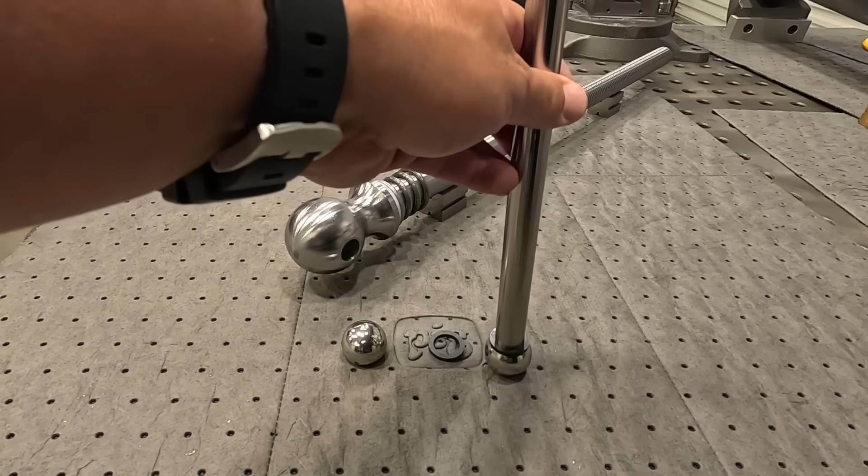So what I did was I measured the OD. Got some calipers right here. I think it was like 1 inch. Yeah, so about 1 inch in diameter, which is the diameter that I modeled this milled surface to. All right, so I wanted to point that out.

So the square O-ring looks like it's fitting on there nicely, and it's tight enough there because I went with a 3/4 ID. This is a 3/4 rod, so it will stay in place. It should not slide up and down. Now, if it gets a little bit of age, it may stretch out. We might replace it, but we'll just have to see. So let's put it in here and see what it looks like completed.

Get that O-ring on and get the last ball on here. There we have it. Man, I'm happy with it. Yeah, I think that's gonna fit nicely. Remember, we got a little bit of a flat milled on there too. It would have been, if I would have thought about that, maybe we could have milled this flat to match that diameter as well, but no big deal. I think it still looks good. That's just kind of nitpicking at that point. I'm real happy with it.

What do you think? Do you like that? You like the way it looks? I like the feel of the larger ball in the hand there instead of the smaller one on the original vise. You see the difference there. So the original, let's just measure it and see. I know it's 1 inch in diameter, and I went with 1¼ inch diameter on the ball ends. So like I said, I'm real happy with it. I think it looks pretty good.